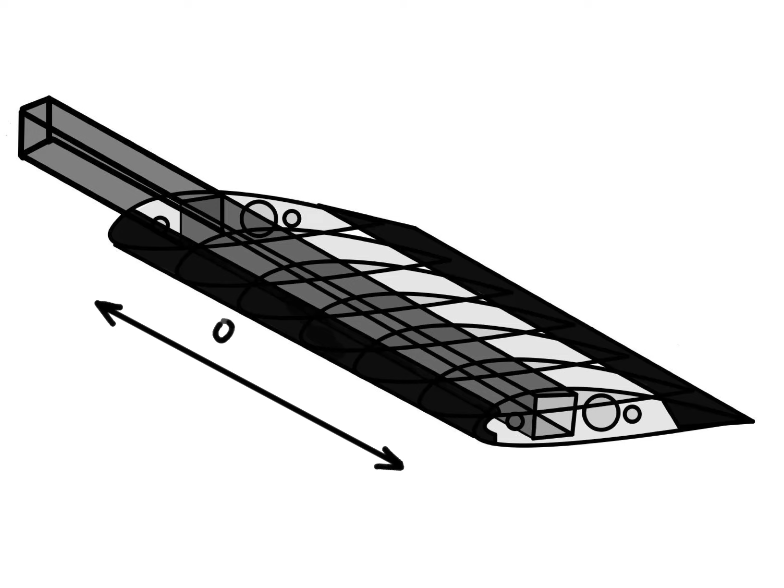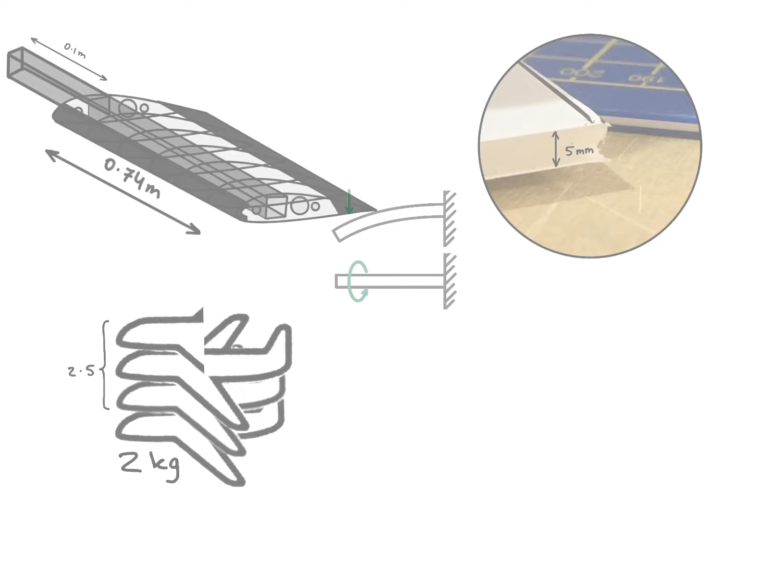Some basic requirements were outlined in the briefing. The wing semi-span must be 0.74 meters, plus a 0.1 meter root to attach the wing to a vise. The wing must be made from 5mm laminated foam board. The aircraft will weigh 2 kilograms, and max load factor will be 2.5. The maximum compliance will be less than 15 millimeters deflection at 1g, and less than 3 degrees per Newton meter for the torsional compliance.

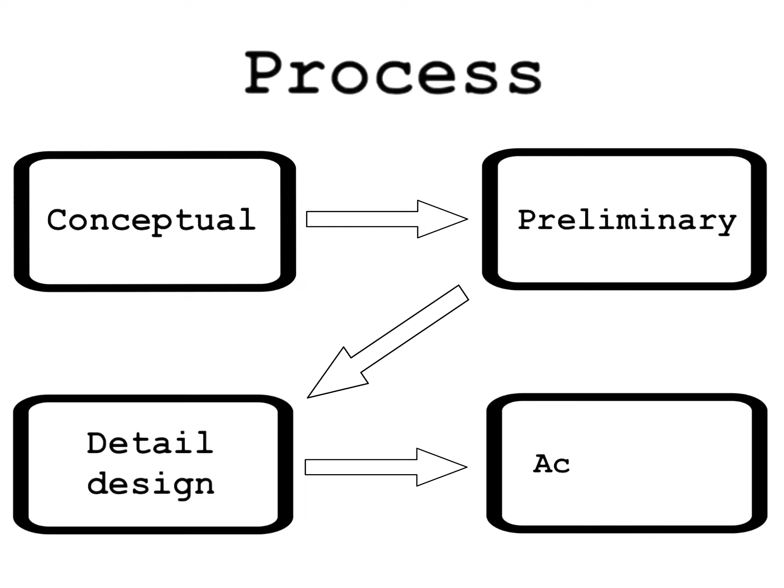The process is structured into 4 phases: conceptual, preliminary, detailed design, and then acceptance, allowing for an iterative design including testing and prototyping. Research began, closely linked with the data output from the Excel sheet.

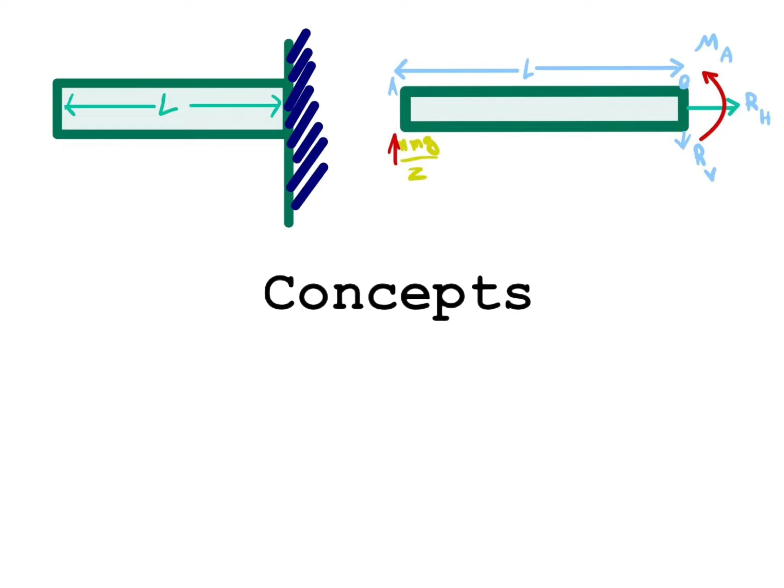Concepts were drawn up on paper to fit with some hand-drawn free body diagrams, bending moment diagrams, and shear force diagrams. A few possible solutions such as circular beams, I-beams, and box beams were presented.

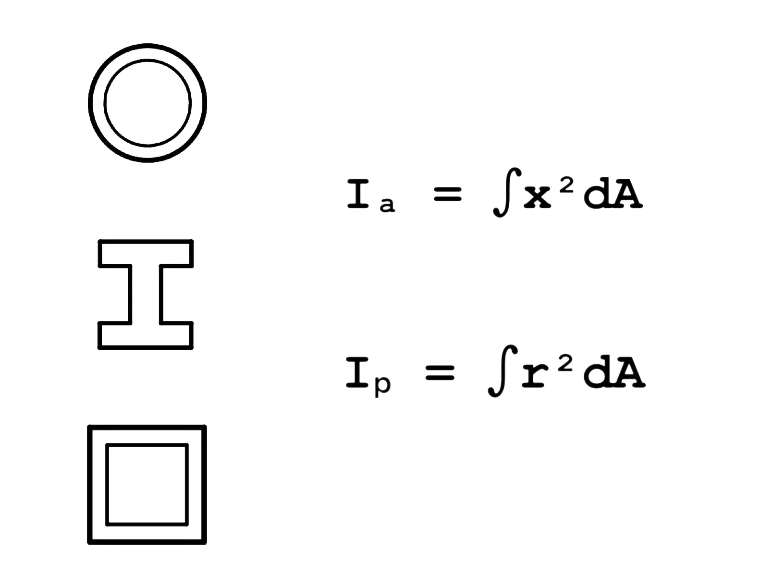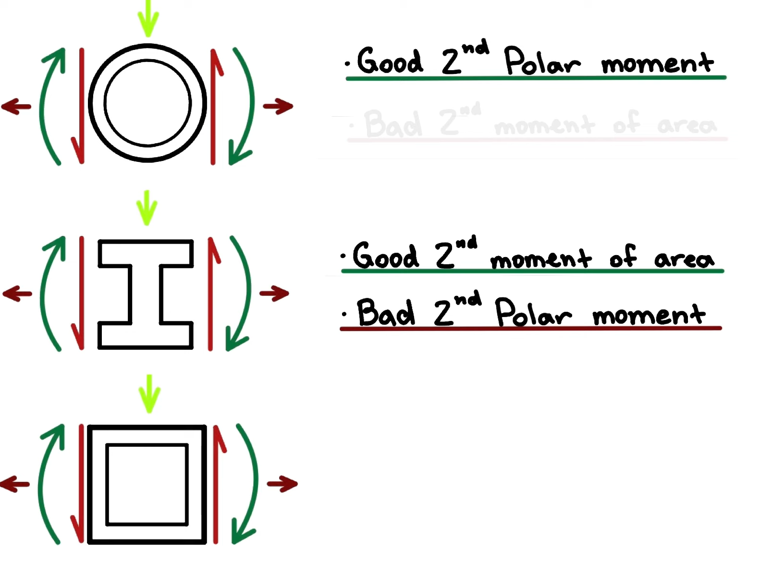To find a good balance, the second moment of area and second polar moment of each structure would have to be calculated and applied. The data showed that I-beams performed the best in direct stress or shear stress, whereas its torsional compliance was poor. Circular beams had the opposite results and performed well in torsion, but performed poorly under bending. Box beams were a good mid-ground for both.

Using this new knowledge, the Excel model was put through rigorous testing until an ideal dimension was chosen. This was to be 48 millimeters by 56.5 millimeters, with a crossbar running along the center for more bending and torsional strength. A safety factor was then implemented to ensure that the load imposed on the beam doesn't cause it to break prematurely in case of manufacturing faults.

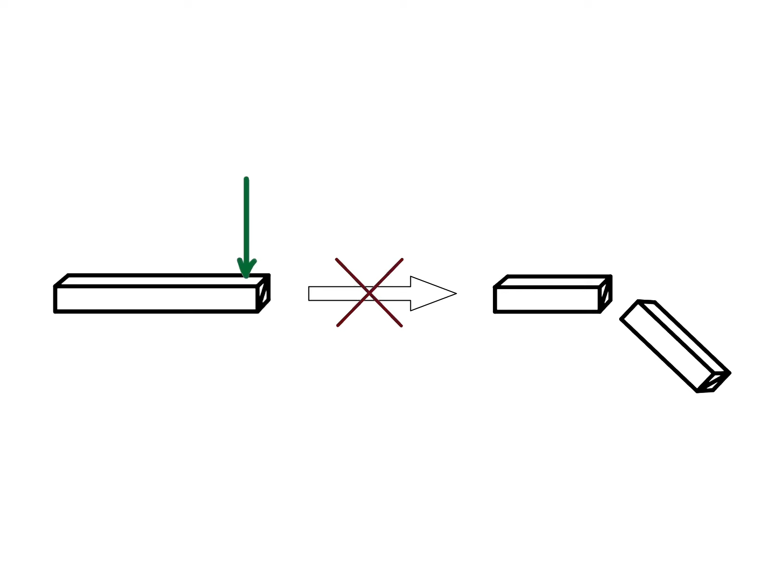To test a few different dimensions for the wing spar, another 2 Excel models were written in the sheet to determine passing and failing parameters. This accounted for direct stress, torsion, and moments about the bracket.

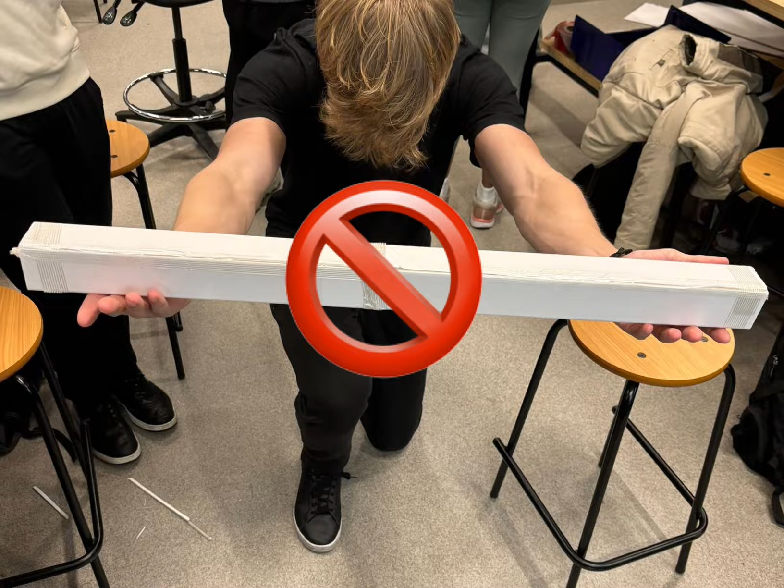A prototype was conceptualized and built in the lab, but proved to be quite heavy. The beam was more than capable of supporting the loads, but was not the optimal solution. The first design did not leave enough room for the top and bottom of the aerofoil ribs, leading to design 2.

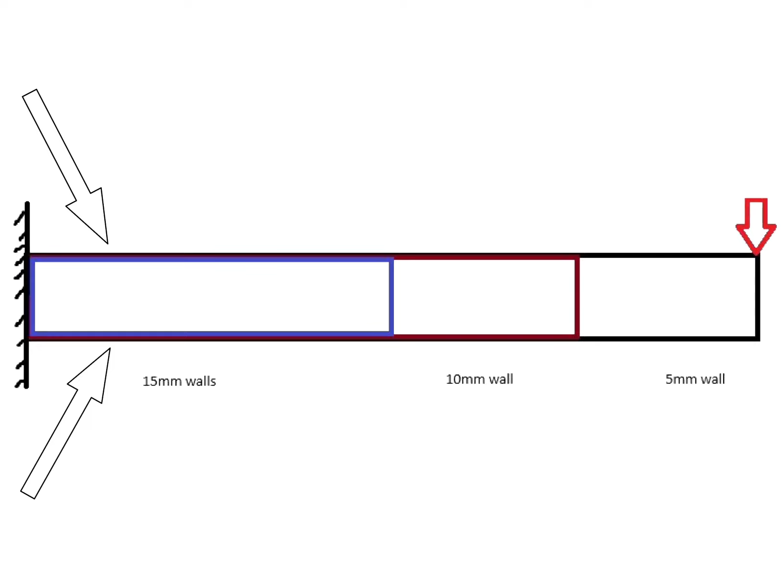In design 2, the shear stress gradient along the spar was considered. This gave us a staircase design which had 15mm thick top and bottom walls at the root, and then decreased in 5mm increments along the spar. This optimizes the stress distribution and still saves weight.

The next stage of the process was to model and simulate these spars and wing ribs in a CAD software. SolidWorks was used in this project as it allows for simulations to show how deflection and torsional stresses affect the beam. CAD was also used to design the wing ribs in accordance with the requirements outlined in the conceptual design.

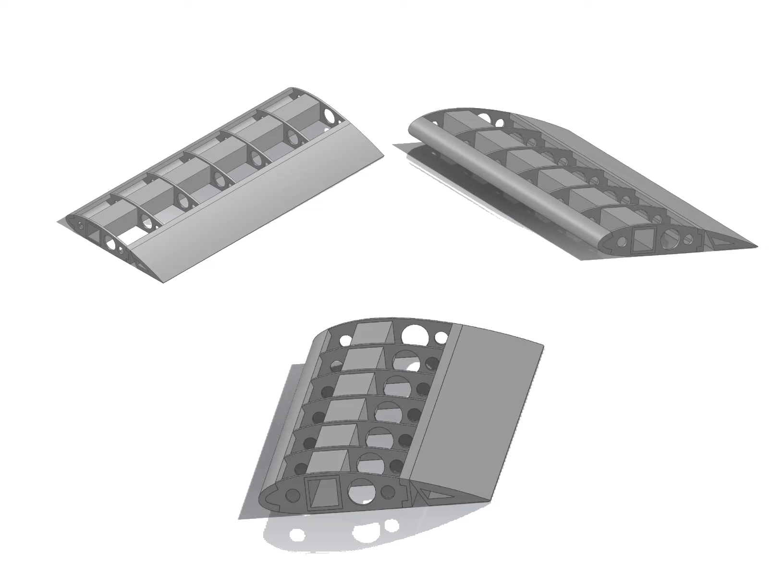These are often quite heavy elements in a wing, and so we focused on removing weight by cutting holes in the ribs while still preserving their structural integrity.

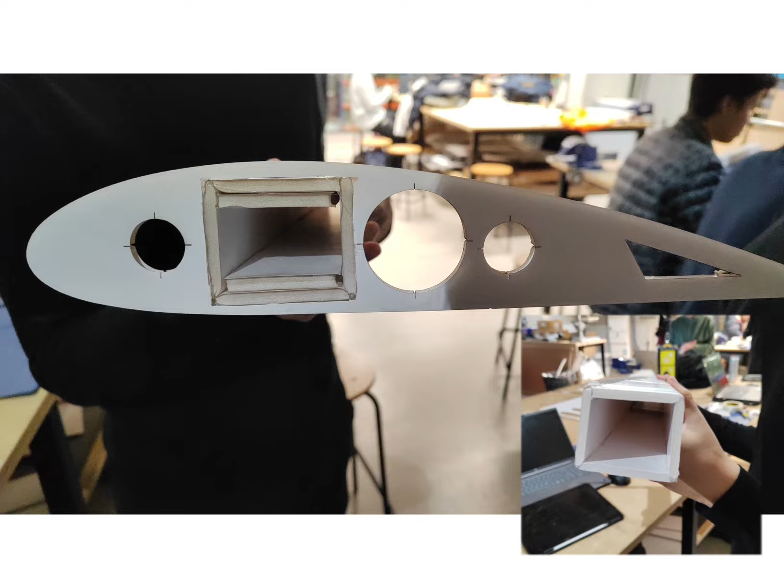To combat this, the scoring tool was used by the laser cutter, and the hole for the spar was cut by hand. Once this was done, all parts could be sent to the laser cutter and cut ready for final testing. The spar was built and tested to see if it would pass the outlined tests.

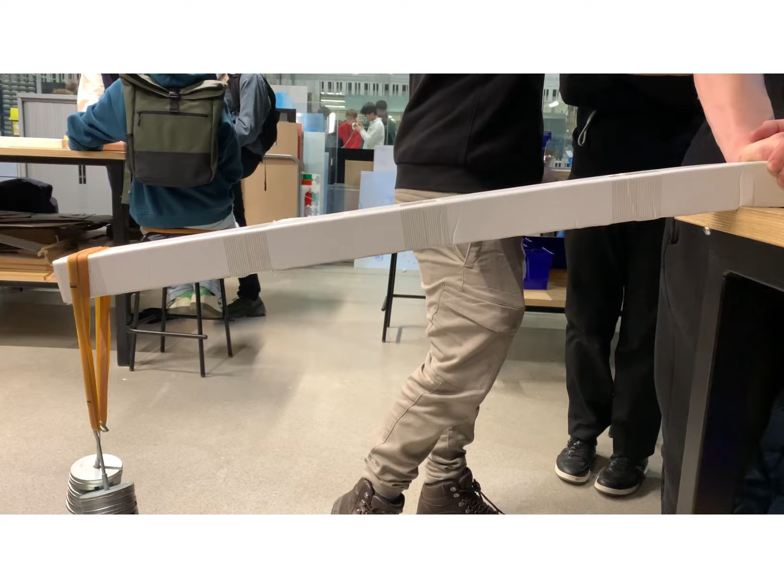This proved to be close to the optimal solution and needs minor adjustments ready for the final showcase. Should more time be allocated towards the project, a lighter and more structurally stable spar could have been made and optimized further. Overall, the result for this project showed the group had good communication and persistence to generate an optimal result.